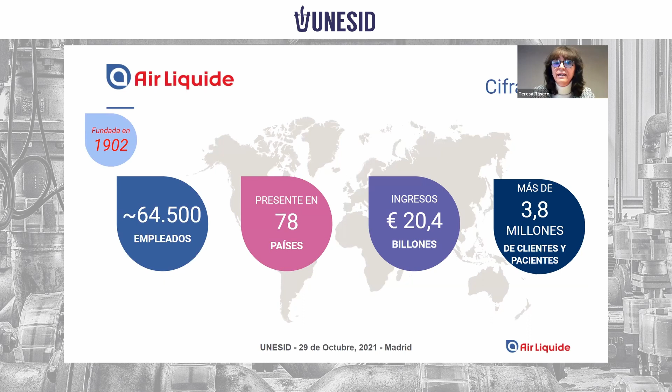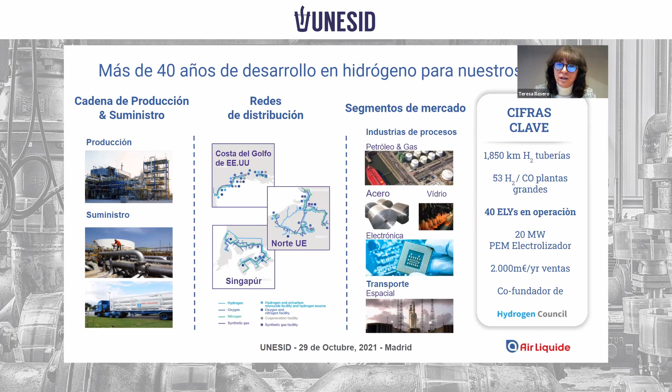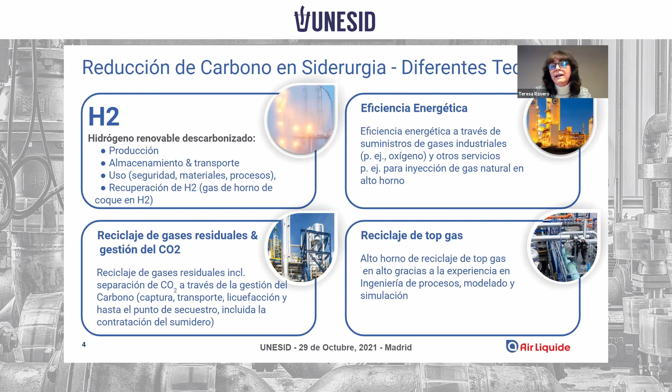If we talk about steelmaking, I won't go into the methods and technologies that are alternatives for carbon reduction. I think steelmaking in this country has renewed its engagement for several years with the energy transition. As Bernardo and Andres were saying, we are facing a new challenge with hydrogen and renewable hydrogen, and how they can help with decarbonization in steelmaking.

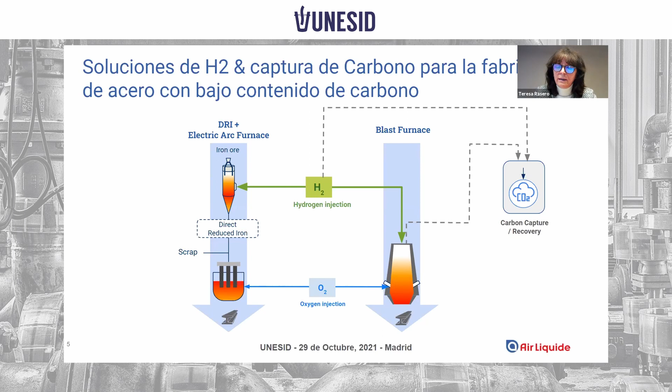As I said, this is nothing new for you, but I'd like to share it. We participate in the Hydrogen Council, which has existed for several years. When speaking of hydrogen before, it was almost like speaking of science fiction. One of the latest updates on hydrogen perspectives mentions that by 2050, there could be a reduction of 18% of final energy demand.

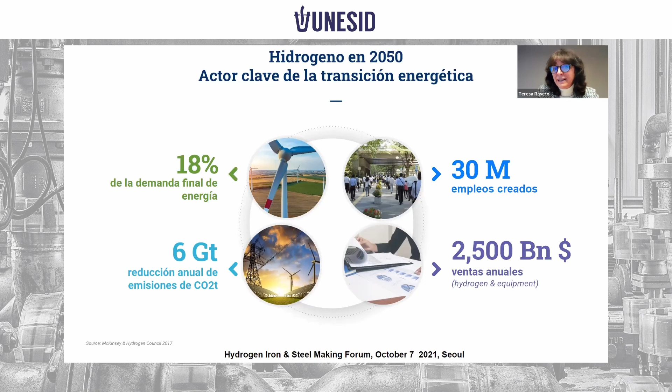This is the missing piece in the mission to decarbonize our economy and production systems, because it may represent up to 6 gigatons a year of CO2 emissions reduction. This is also going to create an important change in terms of sales.

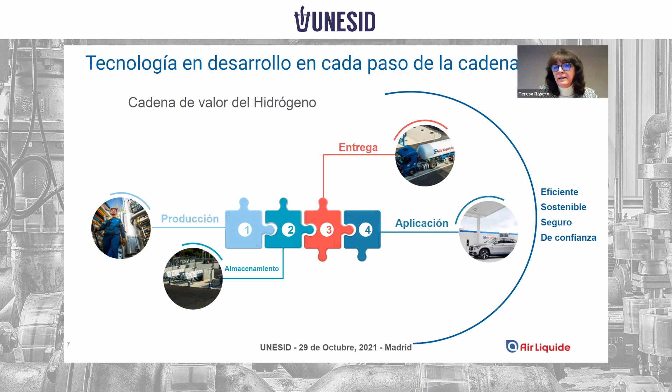As Bernardo was correctly saying, the importance and development of hydrogen has to span all the chain links. The ecosystem of hydrogen that we may build together must strengthen production, transportation, and of course application, because without elements to drive demand, the chain won't be developed.

Regarding low-carbon hydrogen, we often talk about electrolysis, but we think, in line with the strategy of the European Union, that electrolysis created with renewable electricity, as well as hydrogen produced with biomethane, are ways of getting the renewable hydrogen we want for decarbonizing industrial processes. We also think that carbon capture, storage, and use have a lot to say in this process, as we are already seeing in very important projects, especially in northern Europe and also in the United States.

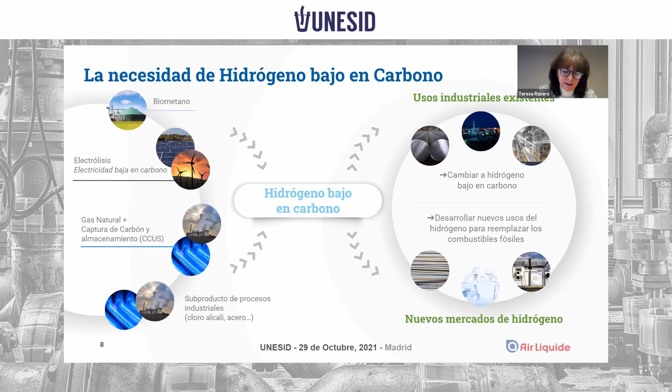The uses of hydrogen. There's clearly an industry that is now consuming hydrogen, and so the substitution of what we now call gray hydrogen - there's clearly a lot of applications here for steelmaking.

The value chain of biomethane seems specifically important because it drives a new ecosystem, one that will contribute to highlighting the zones in Spain and many other countries in Europe and the world that are suffering depopulation. We think it is a chain that needs to be strengthened, so we can get an ecosystem in these areas, and at the same time reach the energy transition we are seeking.

The production of biomethane, as you know, starts from biogas, then it goes to biomethane. One of the advantages is that this may allow us to use assets that currently exist already.

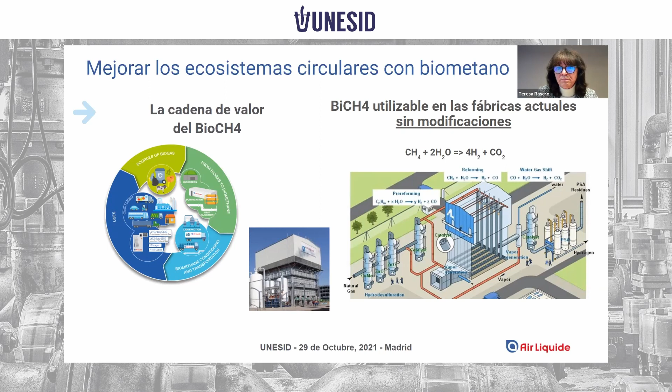I won't talk about technical topics, to not bore you. And I'm not the great expert here in the house.

In terms of production, the most important topic is electrolysis techniques. We'll see later which kind of electrolysis exists, because not all are the same, but we can talk about a consumption of 60 kilowatt hours on average. We're talking about water here - 2.5 kilos of water for production of hydrogen, one kilo dedicated to the process, and another kilo or kilo and a half that is used for refrigeration, which is recovered.

We're talking about hydrogen production that depends on whether we're talking about cubic meters per hour or not. But to give you a rough idea, one plant of electrolysis of 1 megawatt is going to produce 150 tons per year.

As I was saying before, we have different technologies of electrolysis that are at several levels of maturity. Bernardo was talking about this before. The production is going to continue developing. We're talking mainly now of 3 or 4 technologies.

Within the alkaline technology, we can differentiate the atmospheric and pressurized types. The conventional one was developed first. There's an advantage - it doesn't need noble metals - but there are disadvantages: there's low current and the response time is high.

This means that for feeding that is 100% renewable, it has major complications. Bernardo was saying, and also Andres before, I'm sure we will talk about hydrogen still. I think we hear about hydrogen every single day, the projects every single day, but it is a technology that is in development. It's a technology we have been working on for years, but we're seeing how it's accelerating.

The atmospheric alkaline is here on the left, alkaline pressurized here, is obtained at a pressure that is more appropriate for our industrial processes, downstream. And then there's also the PEM, the proton exchange membrane.

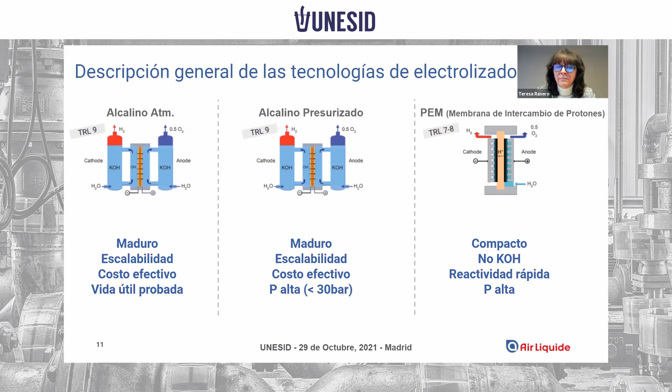Without talking about a lot of technical aspects, there's a third or fourth, which is SOE technology - electrolysis of solid oxide. This technology isn't being marketed yet. It needs very high temperatures. It can be worked at high pressure. It is reversible and has very high efficiency, but of course, the temperature it needs to be worked in is a big disadvantage, and it's very expensive. Different players are researching it.

So that you have a rough idea, the CapEx values currently are quite extensive. But there's clearly a learning curve.

If you allow me to speak of our experience, in 2017 we had electrolyzers throughout the world for different applications in the industry. You can see in context, compared to other kinds of plants, it's kind of little, but it was important for what existed at that time. In 2017, the biggest electrolyzer working only had 1.25 megawatts.

However, 2 years later, we launched in Canada, truly at the beginning of 2020, the biggest project in the world. And now we are advertising very important projects of a bigger size. We published last week the expansion of a project we have in Normandy that will represent 200 megawatts, and we hope to produce 30,000 tons of hydrogen a year.

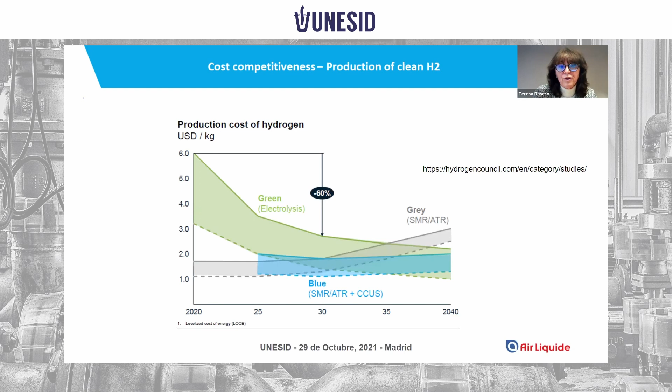We need this and the support. But I completely agree with Bernardo - it's a support not only in production, but throughout the entire chain and to demand, of course. So why do we see a reduction of 60%? 60% is what we're already seeing.

We're sure that with an acceleration like we're seeing in projects throughout the world, but also in Europe, we hope that in Spain, undoubtedly, we will manage this reduction. It will come with the capex reduction, clearly. Of course, with some scale economy, it's not the same to have an electrolyzer of 2 megawatts than 200, of course.

We need to take into account the learning curve, the logic, and also energy costs. This is a main topic here. Without electrical energy, as Bernardo was saying, that is competitive and with a stable, predictable price, it's very complicated to drive these renewable energy projects.

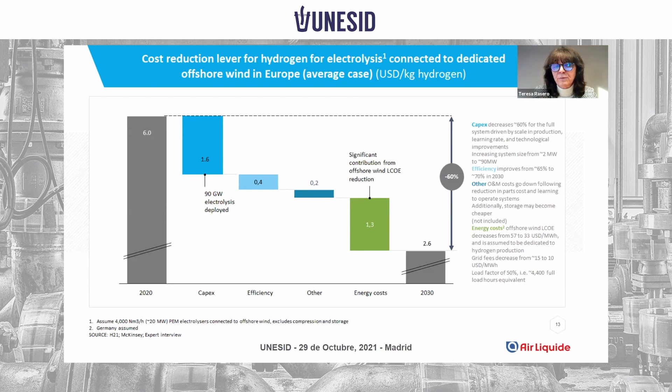But undoubtedly, we are working with renewable sources. We're talking here in particular about forecasting fed by offshore wind. We're starting to see a price range that puts us here at the values of the start of 2021.

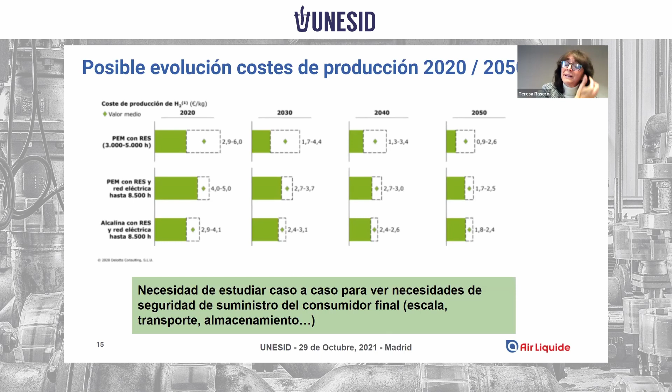And for this, as Andres was saying, we need to accelerate the learning curve. Because if we do not, it's going to be very complicated to get to 2030 as we all want.

Speaking about the decarbonization process, we need to take into account that in our case, in particular in the steel industry, we have worked a lot in reducing CO2 emissions, but there's a great technological challenge towards decarbonization, in which hydrogen will be a key element. And of course, the carbon capture techniques.

But I liked hearing Bernardo and Andres a lot, because you talked about a topic that we all need to realize - important investments, and we need to learn to be able to accelerate the learning curve. This is why we need partnerships to develop these technologies and make them economically viable. We need a legal framework, a sustainable one, and support measures.

We're seeing with a lot of satisfaction how Europe is putting things on the front lines, is supporting investments. In Spain, we have a lot of expectations, high expectations, and I'm sure that everything that our colleagues are able to tell us will be extremely interesting.

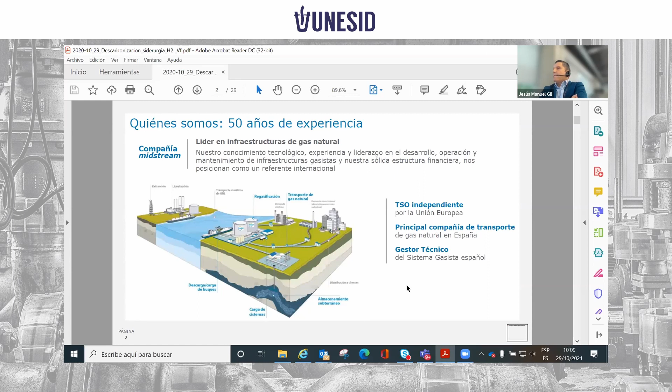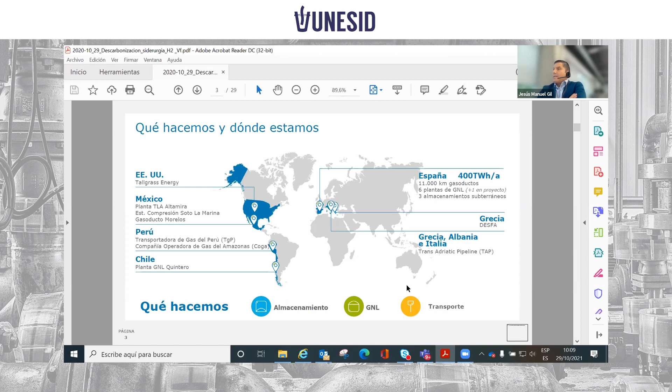So I was commenting on who we were. Our company has an experience of 50 years, an independent TSO in Spain and the European Union. We were born, of course, in Spain. We have more than 11,000 kilometers of pipelines, 6 plants, and 3 underground storage areas. We are present in Europe through the Trans-Adriatic Pipeline program, in Greece, Albania, and Italy. And in America, we are also present in the US, Mexico, Peru, and Chile. Our main assets are the transport of natural gas, storing of natural gas, and the management of liquefied gas.

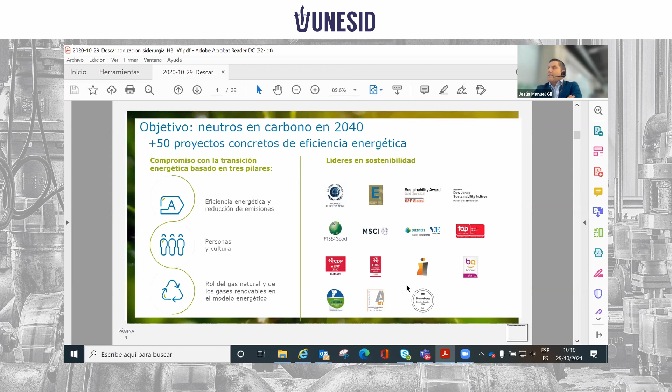We have over 50 concrete projects of energy efficiency, and the main goal set by our managers and by our president was to be carbon neutral by 2040. So we have advanced our decarbonisation objectives by 10 years, based on energy efficiency culture within the structure of the company, and the role of natural gas and renewable gases in the future energy model.

We're going to go into detail now on the second block, which are the renewable gases. These are crucial energy vectors in the energy transition, and in this sense, in 2019, Enagas carried out a strategic program that was consolidated because we created Enagas Renovable, which has all of the developments of future projects based on two pillars or vectors: green hydrogen and biomethane.

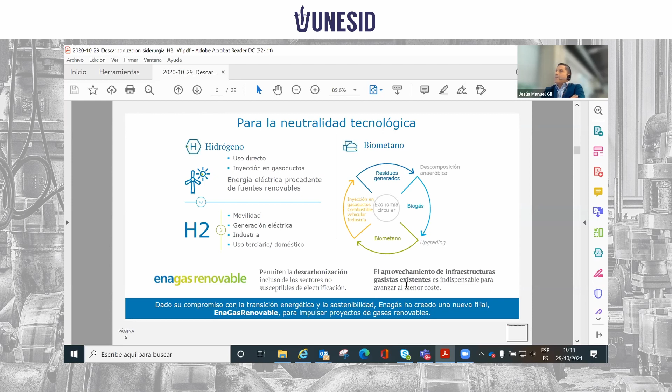So these are two crucial objectives that we have set. We want to be technology neutral, because we will be able to decarbonize all of the sectors and domains. And we're going to make the most of the existing pipelines, because we know that this is crucial so that we can move forward when it comes to deploying these vectors at a low cost.

What are our main criteria to foster our projects for renewable gases? We have 5 main criteria. First, they have to contribute to the decarbonization, and we have to optimize their costs by going towards a fair and inclusive transition.

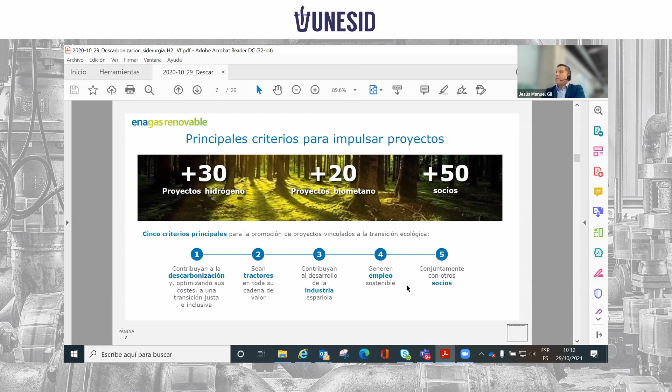Then they have to be driving forces in the value chain. They have to generate sustainable jobs, and we are also working so that these projects are done with partners. As you can see, we have more than 30 hydrogen-related projects, more than 20 biomethane projects in Spain, and we have over 50 partners in Spain.

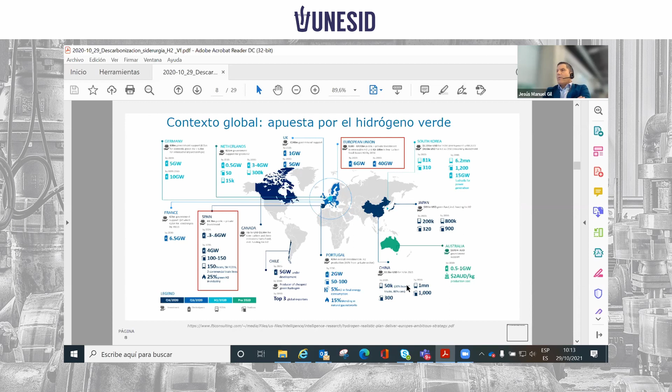These could be applied for vehicles, buses, and essentially for this roadmap, because we will reduce by 25% the current consumption of hydrogen, of grey hydrogen, which actually now is considered to consume between 500,000 and 600,000 tons per year.

So now within green hydrogen, we work on 4 different assets or points. First, we're going to develop our own technology with research and development projects. In my opinion, we have to speak about many things here, and we also have to work on the pillar of technology development and R&D. And why is that? Because it's not only about infrastructure. At the end of the day, if you do not have the backbone, the research and development, it will be really complicated for you to reach this learning curve.

In this sense, from Enagas we are fostering projects based in Spain together with other partners that will give us some hydrogen processes that will be much more efficient than the ones that we have now. And we know that we're talking about commodities - they are electrolyzers, regardless of what the technology is. And we also want to reduce the cost. We do have some alternatives that we think can be much more efficient than the usage of electrolyzers.

And we have to take into account what the Spanish reality is, because we know that Spain has got wind and has got sun, so we have to make the most out of this, and we will look for technologies that will make it easier so that we will not lose efficiency.

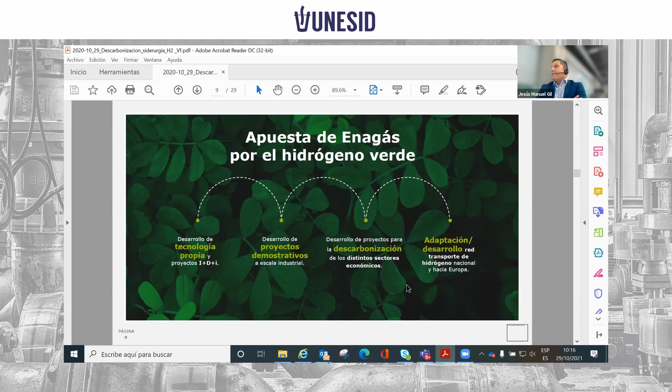We're also developing projects for the decarbonization of the different economic sectors. We are carrying out an analysis or assessment of development so that we can improve our processes in Europe.

We have over 30 projects with 50 different partners. I'm not going to go into detail now, but I would like to give you 3 key points.

First, they are all aligned with the roadmap of renewable hydrogen that we have here in Spain. We focus more on the substitution of grey hydrogen for green hydrogen, and we would like to introduce more renewable energies, and we would like to merge some of these technologies.

We are members of the Spanish Association for Hydrogen, of the European Association of Hydrogen, and of the European Clean Hydrogen Alliance. And we are in charge of the transmission and distribution of hydrogen at a European level.

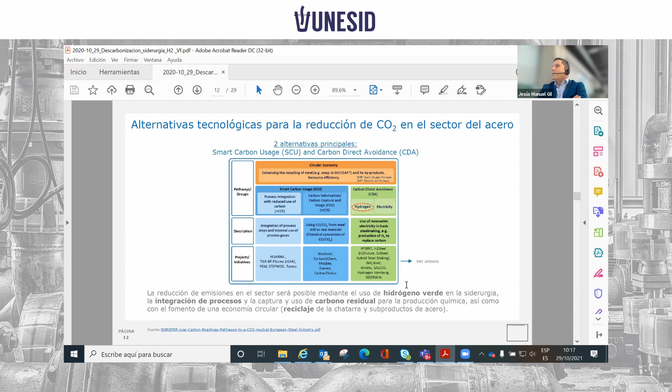And from 2030, or 2025, we would be starting to use the new technologies, the new breakthrough technologies, and hydrogen here will be one of the main assets that we should develop.

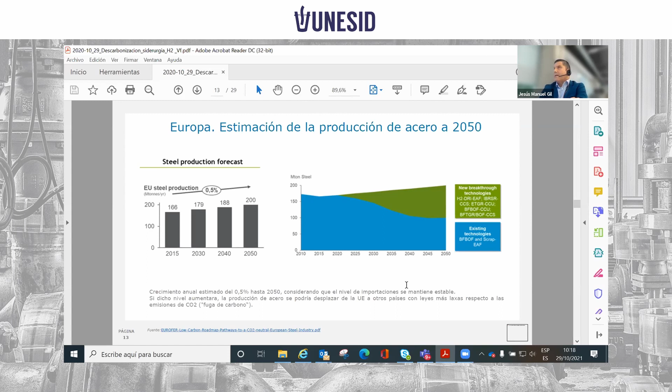You cannot lie and wait for things to happen. This is why we're working. From a low or carbon neutral industry, we have made a great effort since the 60s to reduce emissions. But if you want to reduce emissions by 80 to 95% by 2050, here you have different alternatives to really reduce our emissions to these high percentages of carbon reduction.

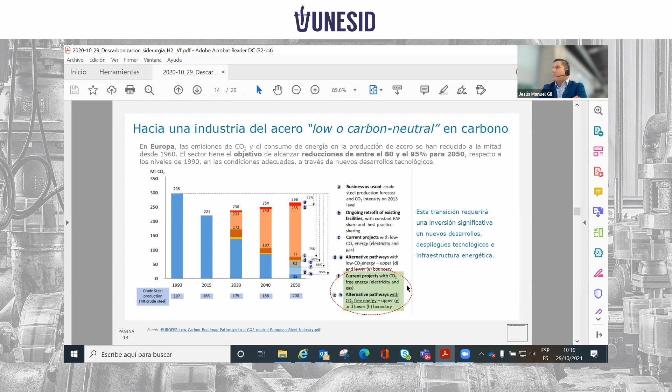This is why I think hydrogen-related technologies will play an important role, and the earlier we can do this, the better. That also means new technological deployments in our infrastructure. So what sectors are key here?

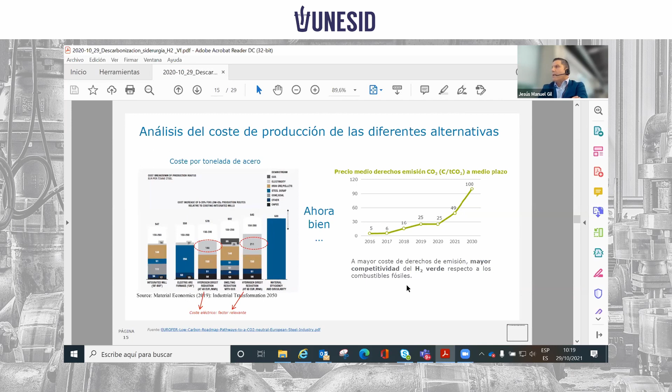As you can see, we have 2 main key points that will play an important role in reducing emissions in the steel industry - I would say actually in all of the production industry. First, we have the energy cost, because we're going to use hydrogen as a producing element. So if the megawatt hour costs 40 euros, or much more than that, it will change things. We also have to take into account the price of carbon tonnes.

We should try to increase the interconnections with Europe by 15%, which would mean 39 terawatts of import and export of energy. What I want to say is that this surplus of energy, this management of energy, this storing of power might be necessary to precisely manage the high volumes of terawatts that we have, and we will require important energy vectors to efficiently manage the electric infrastructure.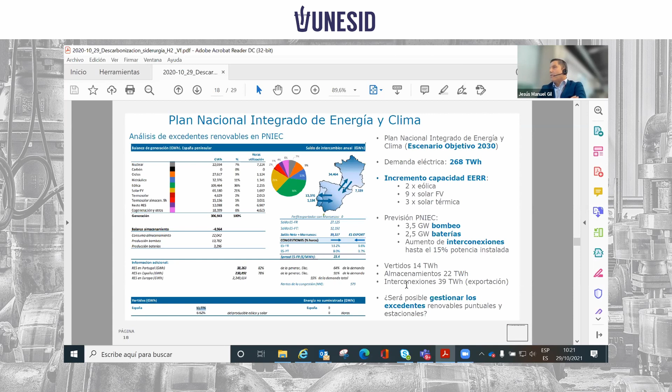And in this case, the pipelines and the gas will play a crucial role.

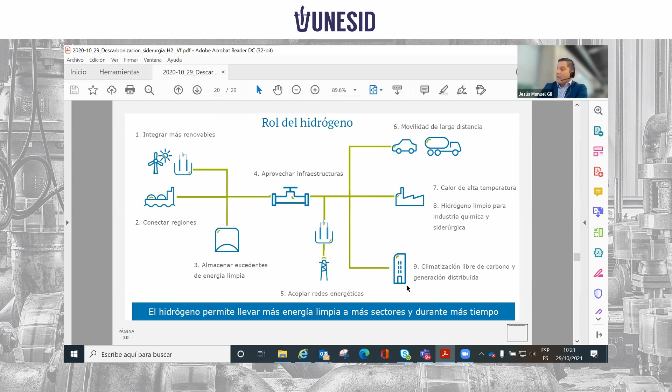What's the role again of hydrogen? Well, first, we have to make the most of the existing infrastructure. We have to connect regions, store surpluses, make the most of infrastructure, couple energy grids, because hydrogen allows us to actually give some hydrogen to other industries, and this is important.

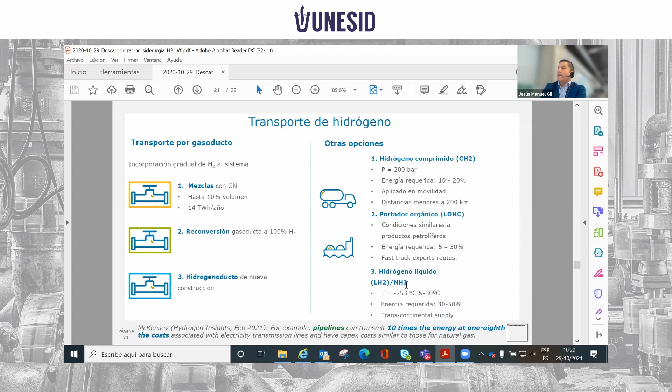So as we have said, we have the possibility to inject some hydrogen into the natural gas grid, and for us this is really important - a means for us to step by step give this hydrogen to the end users. This is why green certificates must play an important role to guarantee the traceability of this energy.

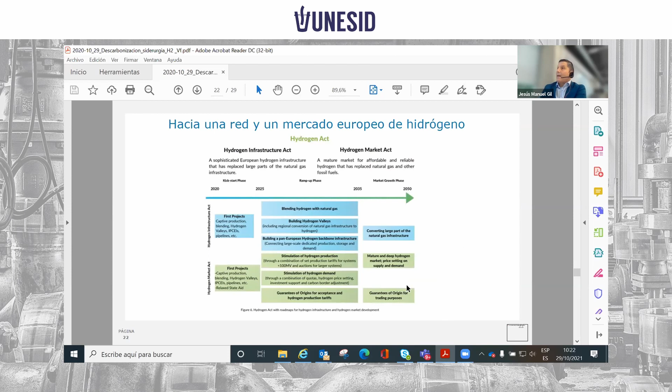So within this Hydrogen Act, you can see the deployment of hydrogen infrastructures, and you can see what the perspectives are for 2020, 2025, and 2050. At the end of the day, we will require logistics infrastructures and pipelines of the same size as the ones that we have now for gas.

In a certain way, we actually committed to the European Hydrogen Backbone Program, and we are working with 11 different countries, and we will be able to connect production points and consumption points with really efficient logistics.

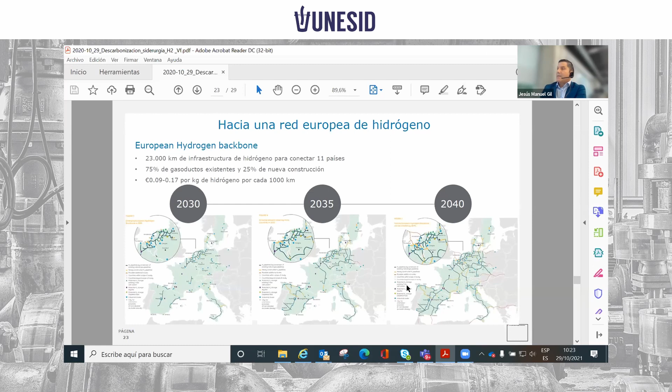Here you can see the estimated cost, and the impact of logistics on the end hydrogen consumption will be really reduced compared to 2040 if we deploy it in an efficient way in Europe.

So what do we need to have such a grid? Well, we have 4 or 5 key aspects. We have to develop a legal framework to classify properly the green hydrogen, and then we will set what the consideration of this green hydrogen will be, and the different legal procedures that we will use on how to maybe change the status of the hydrogen.

This might change every month or not, but we have to know that hydrogen has to be really competitive from an infrastructure or transport point of view. We have to give a little bit of context here and adapt the regulations - hydrogen is a combustible gas, so we have to adapt the regulation to the other fuels and combustible gases that we have now, so that the regulation is adapted to hydrogen, or maybe adapt the best practices. Here we can take the example from the American regulation.

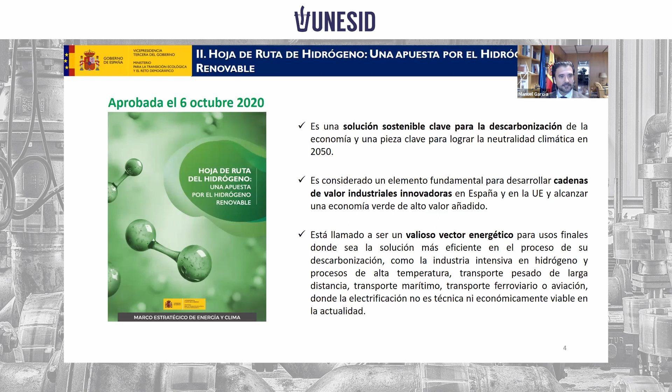And why hydrogen? Well, because with the technologies and the situation of cost curves, it seems to be the most efficient solution in certain energy-intensive industries that need high temperature processes, and in heavy transportation—maritime, rail, air—where other options aren't viable technically or economically. This is why hydrogen is a viable competitive alternative. Let's acknowledge there's still a gap we need to act on.

Which opportunities do we consider renewable hydrogen offers for the Spanish steel industry? As we were talking about, there are industrial processes that could use hydrogen, such as substituting coke in blast furnaces. Teresa and the rest of the speakers have said a lot about this, and I'm sure a lot of expertise is among our listeners.

We also can develop value chains of the hydrogen economy. We increase demand, the offtakers. No doubt society will demand final and intermediate products that are compatible with decarbonization. There are market niches that are starting to appear. If we can identify them and move quickly, they can create competitive advantage positions in the European industry, and we need to spearhead this process.

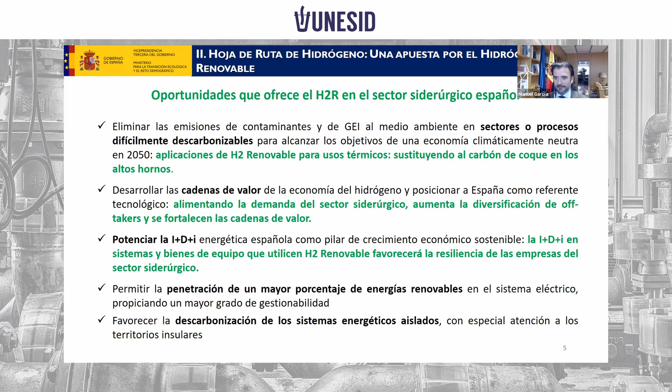There's also a very relevant dimension here that has been brought up by Jesus. Here in Mallorca you can see a good example of this: hydrogen is a very valuable tool in those isolated energy systems and renewable systems. Spain has good examples of this due to its size, dimension, and partial or total isolation. It has higher difficulty because it cannot really enjoy this kind of scale economy.

Manuel, we have 3 minutes here for the general conclusion. Sorry.

The roadmap has a vision here for the development of 4 gigawatts until 2030, with quantitative goals in other sectors, such as transportation, where hydrogen may appear, with data on the deployment of networks and lines of buses that use hydrogen fuel, which the roadmap prioritizes.

We believe that the big gains here are substituting gray hydrogen with green hydrogen. 70% of hydrogen in Spain goes to refineries, and this is where we have a big decarbonization opportunity. This is where we should gear our lines of action.

Here are the lines of action. We have regulatory tools or instruments, many coming from Europe—we talked about directives and EIA. Of course, we need to harmonize and update this, because hydrogen, as we have said, is in a chemical industrial scope.

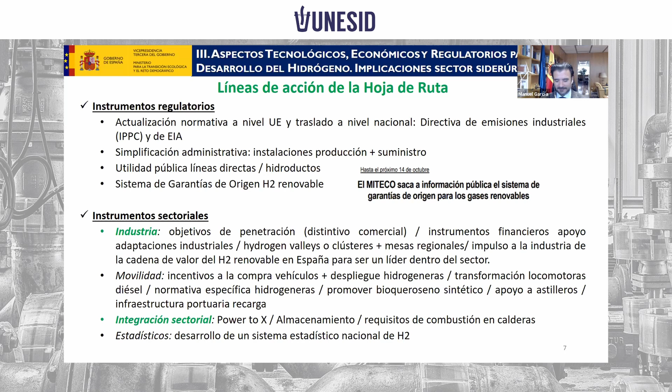Also, the roadmap addresses sectorial integration, which has to do with hydrogen as an energy vector. We have written down those aspects that have the most important implications for the sector.

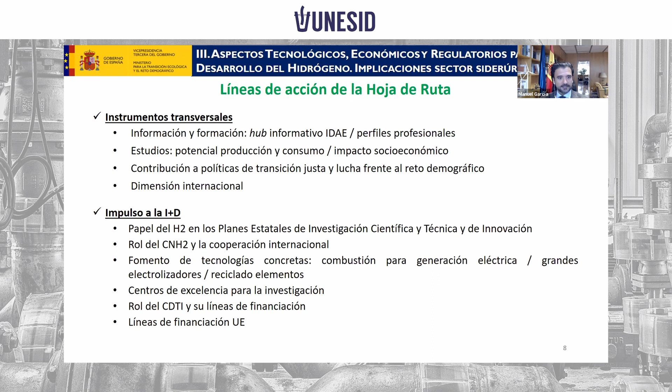And here we have cross-cutting instruments. Especially considering research and development, we have to drive the learning curve and cost management to be able to fill the gaps.

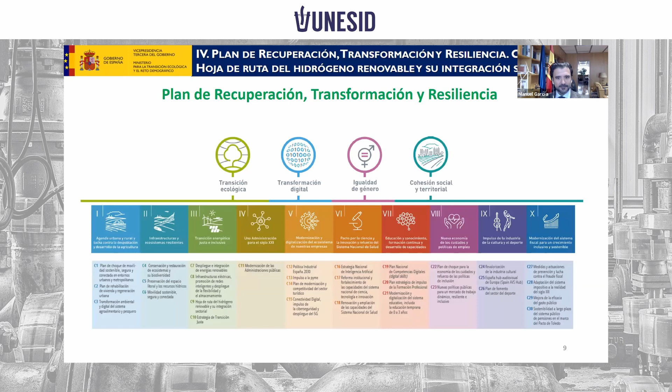To finish here, a very brief reference to the PRTR, the Recovery, Transformation and Resilience Plan. We have 10 leverage policies and about 30 components. There is one specific just and inclusive pillar that already has this objective, which fully coincides with that of the roadmap, and it has a total budgetary allocation of 1,500.

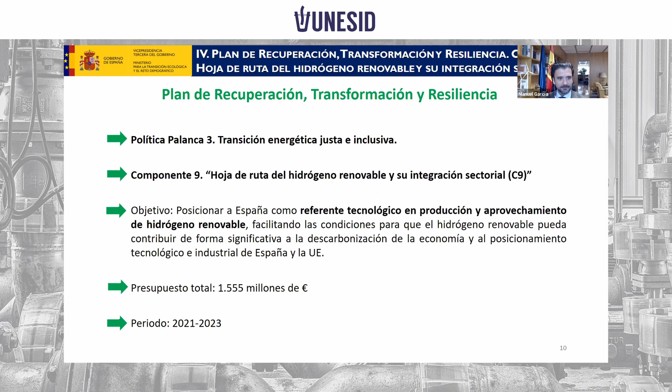We have a budget of 1.5 billion euros up until 2023, and we have 4 pillars of action.

The first is the innovative and knowledge value chain, focused on industrial development of production and research and development. Line 2 is clusters of renewable hydrogen, which allows us to join...

...all participants of the same value chain, leveraging synergies and circular economy. Line 3 covers pioneer singular projects, which will receive hundreds of very interesting proposals. Line 4 is focused on the integration of the PRTR with the project.

This wants to match the lines of the recovery plan with the waves that have started at the European level. The first wave, last summer, drove and highlighted those projects that have an impact on industry.

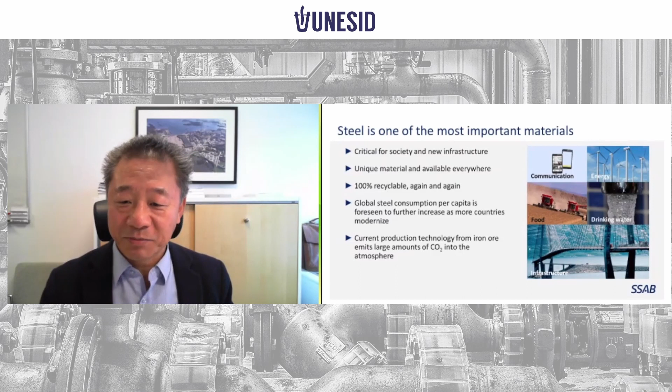Currently there are a number of different technologies that the steel industry is developing, and I will now show what our development work has focused on and how far we have come.

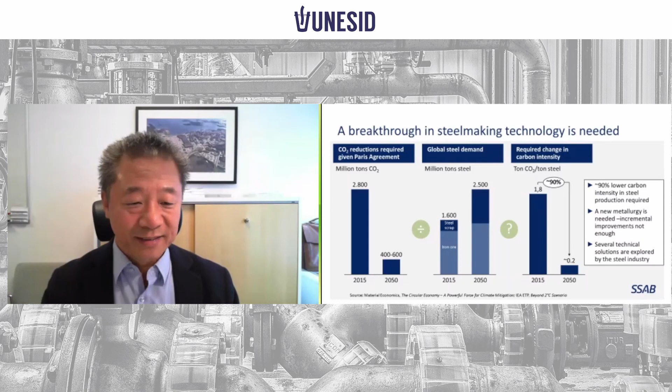SSAB is the largest steel company in Sweden and Finland. Our blast furnaces are very, very efficient since we did a significant transformation 40 years ago. Together with LKAB, we developed very high quality blast furnace pellets that LKAB invested a lot of money in to produce, and SSAB runs all five blast furnaces we have in Sweden and Finland with 100% of this iron ore pellet. So the blast furnaces we're running are very close to what's theoretically possible with current technology. But still, SSAB as a single company is the company that emits the most carbon dioxide, both in Sweden and Finland.

We stand for 10% of Sweden's total CO2 emissions and 7% of Finland's CO2 emissions. At the same time, Sweden has a rather good starting point, since the electricity grid is fully decarbonized, and Sweden also has excess electricity production capacity. So with a long history of developing the metallurgical industry, and a tradition of cooperation along the value chain, we suggested creating the HYBRIT initiative, which we have been working on since 2016.

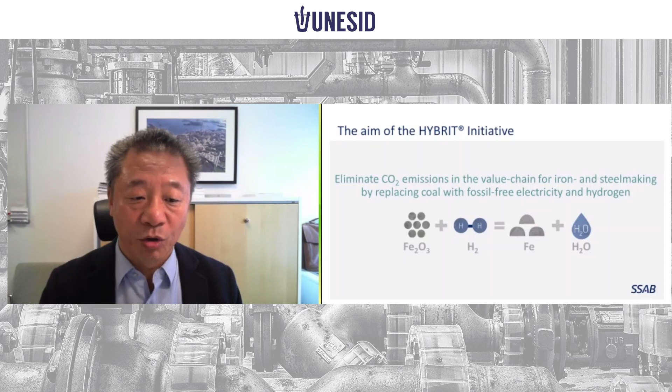When we started the project, we launched a quite significant R&D program. We involved most relevant universities and research institutes, and later on also created Hybrit Development AB, a joint venture company owned equally by SSAB, Vattenfall, and LKAB. We have then done a very extensive pre-feasibility study.

This chart summarizes the conclusion from our pre-feasibility study, which compares our current production technology using iron ore pellets-based steel production in northern Sweden, compared to if we would transform into the HYBRIT process route shown to the right of this chart, showing how the main consumption figures and emissions will look like.

So what we essentially want to do here is use this high quality iron ore pellets that LKAB makes today. Instead of going through the blast furnace using coal and coke, we want to go through a shaft furnace-based direct reduction process using hydrogen, and hydrogen we want to produce using water electrolysis.